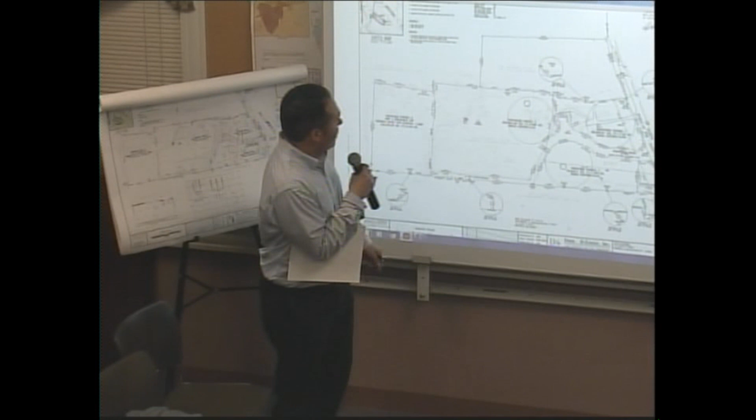If we could go to the next sheet, I think it shows it a lot more clearly what we're proposing. So there's an existing home right here that has access off North Street. There's another existing home to the rear of 113 North Street, which has access through the other driveway of the home that fronts North Street.

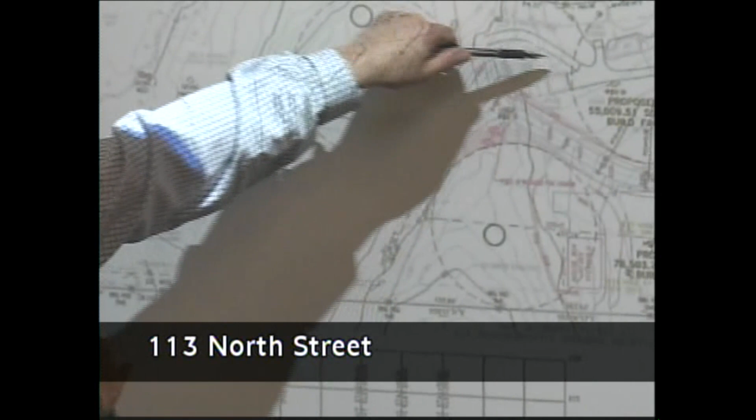The proposed work is to add a roadway, essentially a driveway, that would provide access to this existing home in the back rather than go through the other property. We would also add a new home off this new driveway.

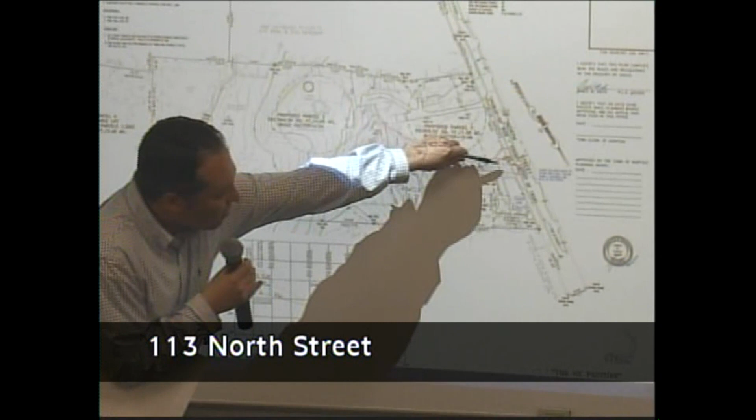We're looking at an 18-foot roadway driveway with a cross slope where we would have a grass swale, country drainage to a low point, and then there'd be a culvert that would bring the stormwater to this natural low point, which is where the entirety of the site drains today. So we establish the same drainage pattern with the proposed versus the existing, take advantage of that low point, and we'd have this country type drainage system, keep things simple.

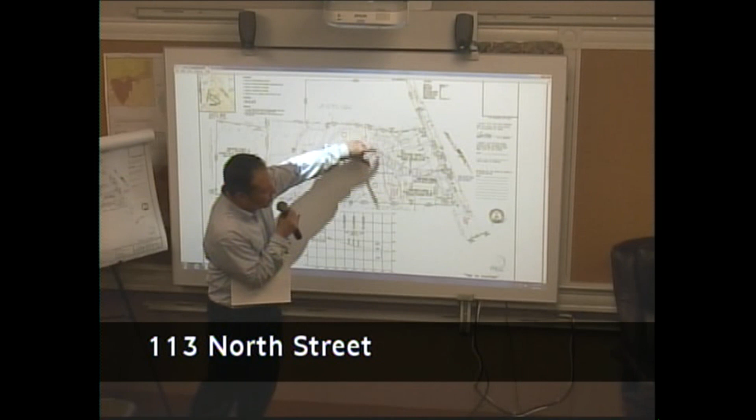The only piping would be a culvert that brings it from one side to the other. The goal is to clear as little as possible, keep this natural, so what we do is only clear enough to get that pipe in the inlet flow. Other than that, we would keep it natural. We've done what we can to keep the grading limited as much as possible. It's entirely within the right-of-way that's shown.

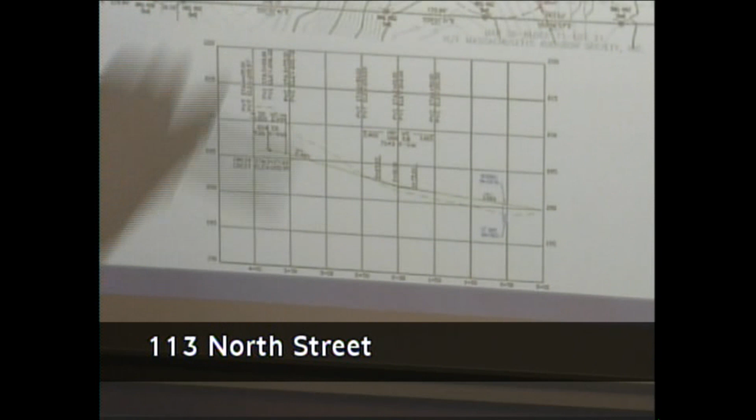We have a basic profile here that shows a grade coming off North Street up at 1%, and then it transitions to 2.4%, so there's a slight vertical curve. This detail here just shows the cross slope. It shows this grass swale that'll be on the south side of the new roadway.

As far as new utilities, again, one drainage pipe crossing. We'll have a new water service for this new house, and we'll have new electric service for this new house. And that's underground? Underground.

That's the basics of the project. We have other sheets with construction details, but this gives you the overview of what we're doing. So again, 2 existing houses, we're adding a third and making it simpler for access to this rear house.

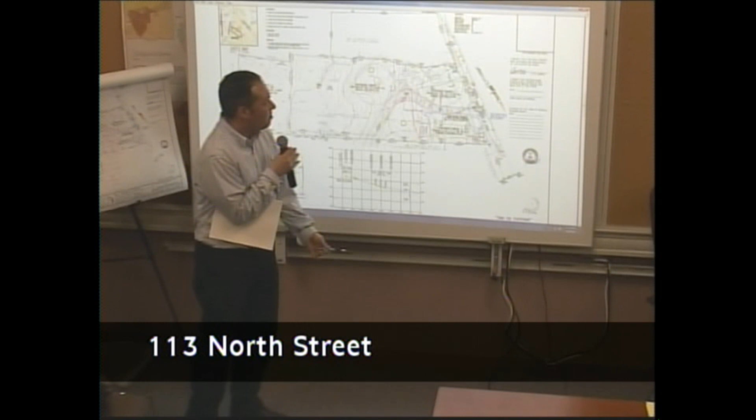There's also, if you look through the peer review, an existing garage over here that has been here a long time. All of the homes here will all be part of the same family. I know there were some comments about the garage possibly being non-conforming in how it was set up, and they understand that. The goal is to keep it as is, because it's been there for so long, and it's part of the same property that the family will continue to use.

A lot of the comments had to do with waivers, whereas we don't have a traditional roadway with curb and lights and so forth, where we have the country drainage approach. It's very similar to just a widened driveway.

So when you say country drainage, you're talking about a low-impact drainage? Exactly. Did you do a drainage report on this? We did. Okay, we submitted a stormwater management report with all the calculations. And that works, the soils work? They do. So up in this area, you have Group A soils, and then it transitions to Group B soils. In this low point, it's Canton, fine sandy loam.

So, good soils. We did test pits over here, where the proposed septic will be for this house. We were consistent with the soils mapping. We went down 11, 12 feet.

How long is the roadway? It's just under 400 feet. It's 395 feet.

18-foot road, did you check with the DPW on that? Because right now, we're widening roads that are 18 feet where two trucks can't pass, or a fire apparatus and a vehicle without stopping. We have one over on Lawrence Street now that we're bringing up to 24 feet that is currently around that.

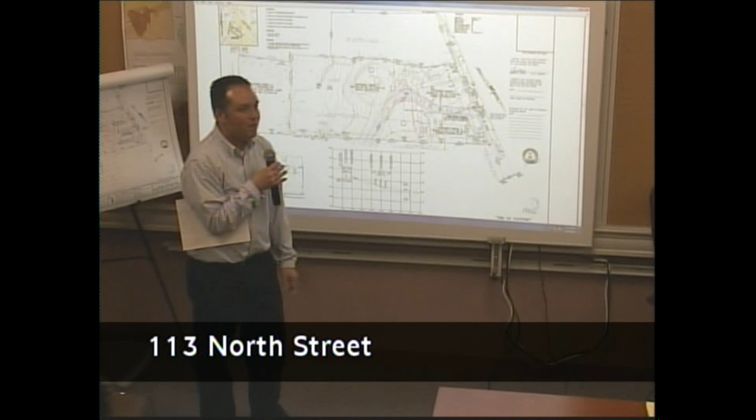We didn't, we filed it, and we'll need to get their review and comments. We have a shoulder on each side of the pavement, so it gives you an extra 3 feet on each side if it's really tight. But I think between the shoulder and the pavement, and the fact that there's one house in the back, and we have plenty of sight distance, I think we can make it work with how we show it, as long as it's acceptable to others that are reviewing it. So are there swales on the side of the street for the runoff?

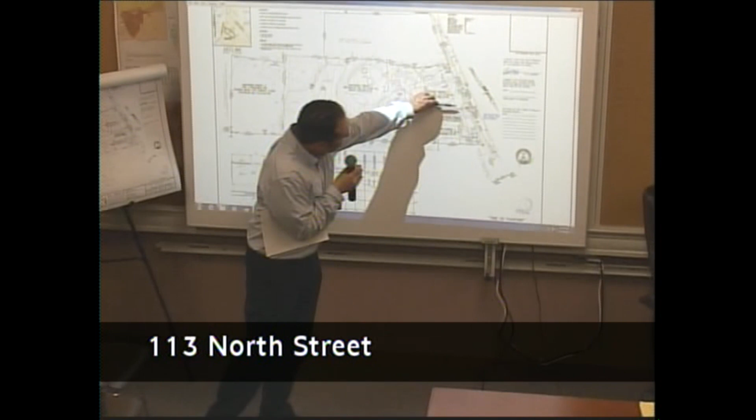There are. So there's a cross slope to the pavement from the north side to the south side, and on the south side we have a swale along the length of the road to a low point at about station 0 plus 50, and then we have a headwall with a 12-inch pipe culvert that brings the water that runs off on the south side of the road, as well as the roadway itself, to this low point where it goes today.

We had the same thing here on a road over by the airport. We have no curbing on the side with the swale. You have the potential of the runoff undermining the asphalt and getting in there.

And is this going to be a town-accepted road? Is that your intention? Oh, it's not. It's going to be a private road? Okay, yeah, okay.

Because over time, with the ice and the snow and the rain, some of the runoff coming down undermines the asphalt, and you get sinkholes where the edges start to break down. In the past, I think we've had something like a foot or so of crushed stone along the pavement area to act as a buffer, so the runoff wouldn't undermine the edge of the roadway, but that becomes less important if it's not going to be a town-owned property.

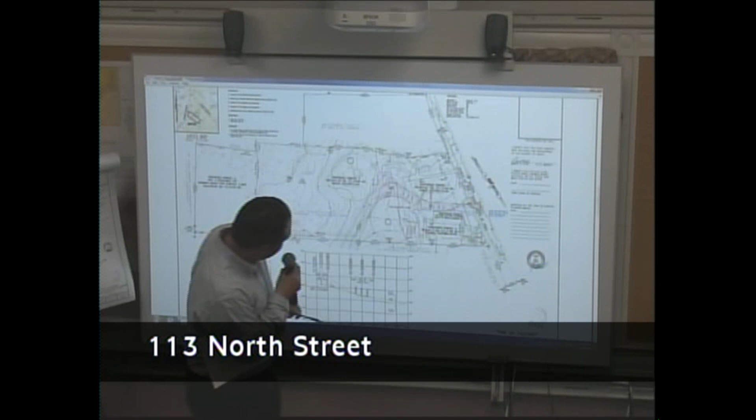What's the earth removal situation here? I have to run the calculations, but it's showing a fill, or slight fill, coming in from North Street until about halfway up the road, and then there's some cuts on the side. I don't know the exact quantity, I need to figure that out.

Is it, do you think it's a balance, or? It's close to a balance. The only cut is the side slope area over here. I believe it's below the threshold for the earthwork permit, but I can confirm that.

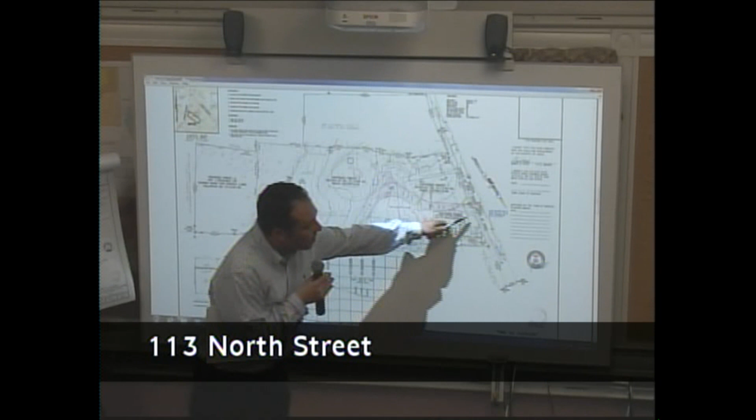Is that area wooded right now where you're putting the roadway in? It is. So you're going to maintain that, as much as you can? Yes, we've been able to get the grading and match it as close as we can so that we don't clear outside of the right-of-way. We can maintain this natural area. And really, you'll just see a driveway opening and some clearing at North Street.

Does the old road, is that just obsolete? You may have mentioned it before and I didn't hear it. So there'll be a section of the old driveway that accesses the back lot, and yeah, this would become obsolete. It would actually go away.

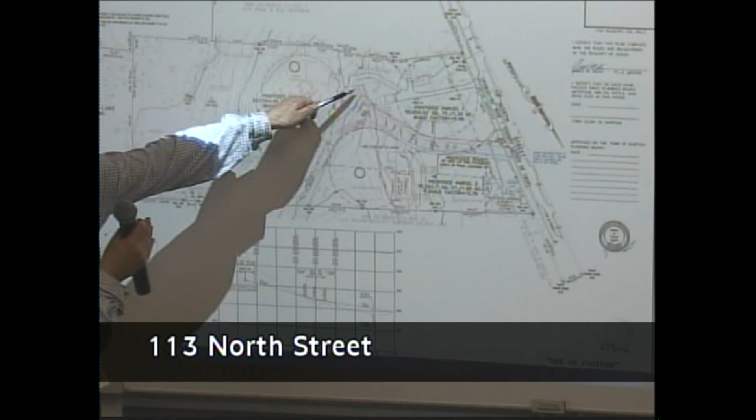One of the review comments was to work out a construction detail where we come off of the new roadway to transition to the house, so we didn't show that level of detail, but we will. Is that why, Rich, the beta isn't here, because you're going to have a meeting beforehand on these issues? Yes. Okay, good.

Okay, any other questions by board members? No, mine. Aaron, you okay? Anyone in the audience care to comment or ask a question? Please use the mic, go ahead.

Donna Jones, North Street, but not an abutter. I also have spoken to Doug Williams, the director of Mass Audubon Stony Brook, who is an abutter on three sides.

Could you go to the other pages, like page 5 and 6? Yeah, sheets. Well, what is that, 6? And on this next page, the pink.

This is a pre-development subcatchment map. The yellow areas are part of the drainage calculations, that's the catchment area that drains. Then the next page, that same area is shown in pink.

The previous drawing was pre-development, that's existing conditions, the watershed that drains to the low point. For post-development it just showed a different color. It's that same catchment area, but we've broken it up into smaller areas to reflect the house lot, the roadway, now that it's changed. So that's how we're able to do our drainage calculations, looking at the pre-development and post-development mapping. The colors don't have a lot of meaning, it's just how we showed it.

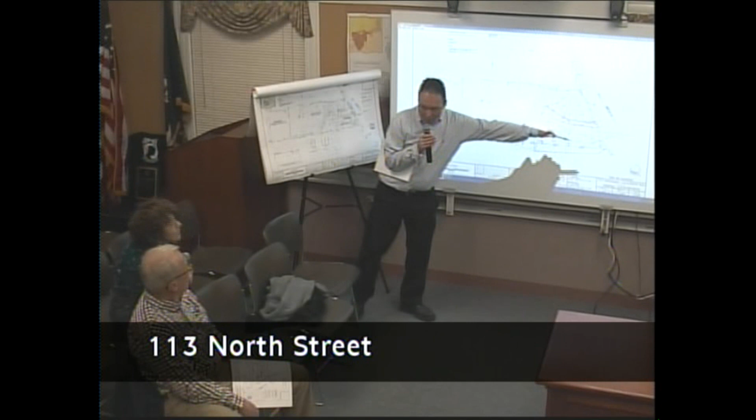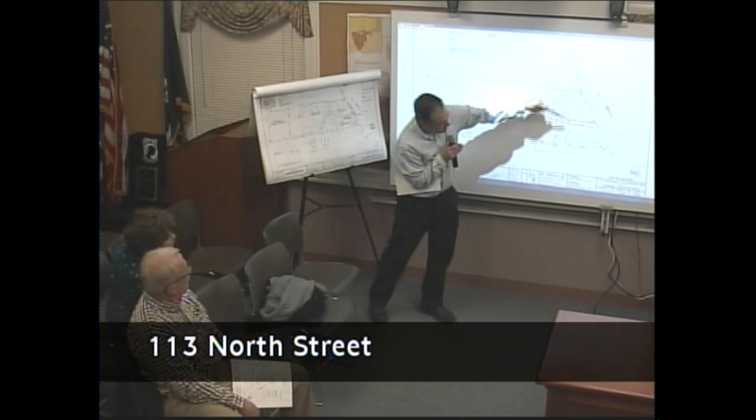And what are the 6-sided figures with numbers inside? These represent each subcatchment, it's just a graphical way of numbering them. It's the area that drains to a particular location. So for example, this outline all drains to this low point, whereas number 3 over here drains to the pavement and the swale. Number 2 drains to the pavement and the swale, and it shows how we built our model of how we direct the stormwater to this point. So if you follow the calculations on the map, it gives you an understanding of what's happening with the calculations.

So this back section, right at your left shoulder, is not to be disturbed? Correct, so everything this side. No, I meant the back, that back will not be touched, and that's wetlands. Correct, wetland resource. Correct, partial. Remains the way it is. Yeah, partial wetlands and...

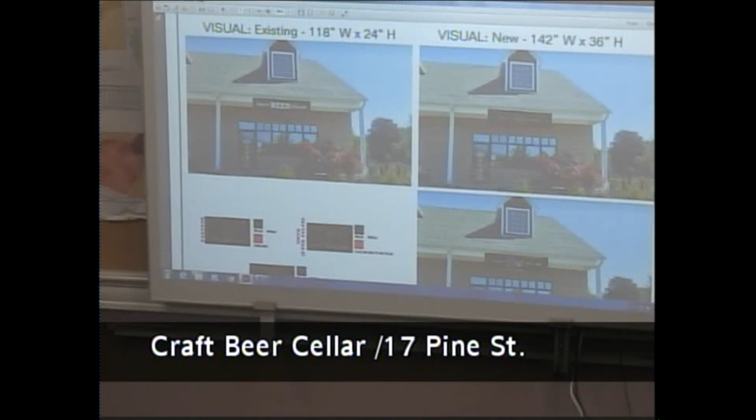So on the left is my current sign in its current size, and just to the right of that is a mock-up of what it would look like with a slightly larger sign. I think that unless you were looking for the differences, you would probably not spot the difference. So I'm pretty sure that would be acceptable to the overall scope of what the rule is about, which is you don't want anything too ostentatious and big. I get that.

But it would allow me to put slightly larger lettering on it, and hopefully be a little bit more visible. It's interesting, just looking at those two pictures, even though the sign on the right is larger, the font chosen on the sign on the left stands out a heck of a lot more.

That's true, and one of the unfortunate realities of my situation is I'm a franchise, and I'm required to use specific fonts and trademarks. That was the one that was approved at the time of my opening, and sadly, a mere 5 months later, the franchise decided that it was going to change their branding.

Can't win, you will lose, and you must play, huh? Yes, sir.

But it's a much thinner looking script. Yeah, I believe we would be using something that's more like the option underneath it on the right, the bottom right one. So that is a little bit more visible. In fact, at least the word beer will be visible. That's one of the reasons I wanted to do this now, is because I'm forced to go with that slimmer looking font, and I want at least a hope that I can be noticed from the road.

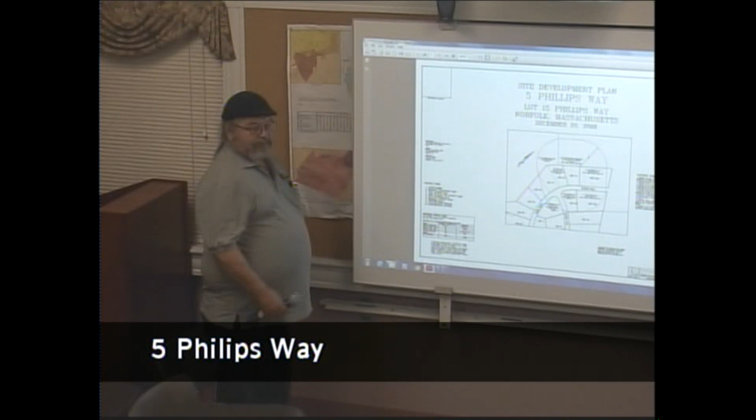So before we get started, just a couple of points from last meeting. I know the question came up about the site plan not being expired yet and whether to relinquish the rights, and so forth. So I did talk to town counsel. In this particular case, it worked out okay because the timing elapsed, so it wasn't an issue. But in the future, it would be good to have the person relinquish the rights to the previous site plan approval.

But it didn't end up being the case here. Although in this case, it would have been even more challenging because they bought the property and it was another property owner. But needless to say, it's not an issue here, going forward. And then there was something else that we talked about. Well, I'll let Jim present it, I remember it. I'll interject. Good evening, Jim Susi with United Consultants.

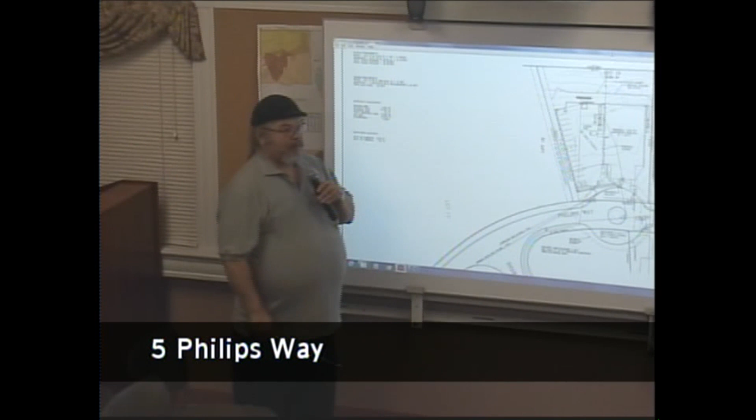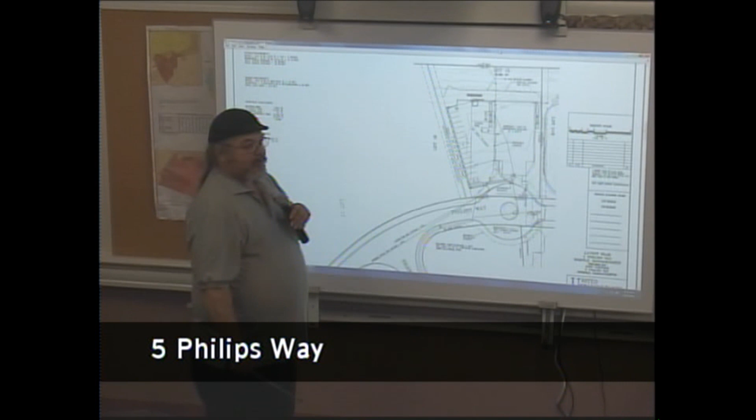We've begun making revisions to the plans based on Beta's comments. I had sent Betsy over this afternoon a somewhat revised plan for the stuff we've had a chance to address. On the basic layout plan, I believe we had 12 parking spaces before Beta determined that we need 18. So we now have one here next to the building, a row down here to get us to 16.

And 2 more in between these 2 overhead doors. We're showing the required 400 square foot loading area. And to make this all kind of fit, the dumpster originally was down in this corner. We've moved the dumpster to here, and this will now become a landscape island, which will help us add a little bit of the interior green to get to that requirement.

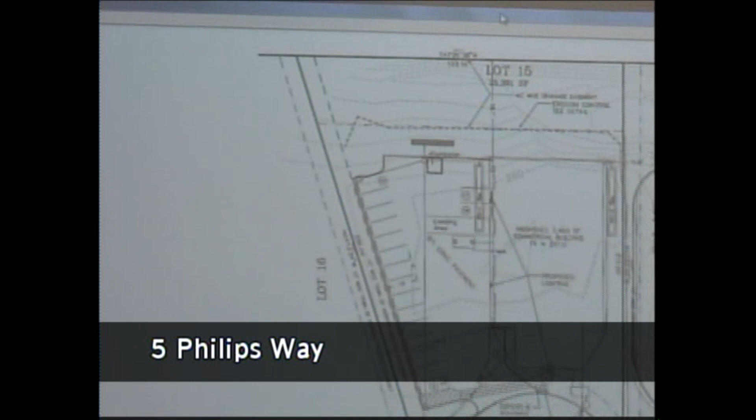Where are you gonna put the snow? I have to take a look at where we had it before. I think we were just putting it on top of the landscape island. Yeah, that's the question. Again, by the zoning regs, it says we need 18 parking spaces.

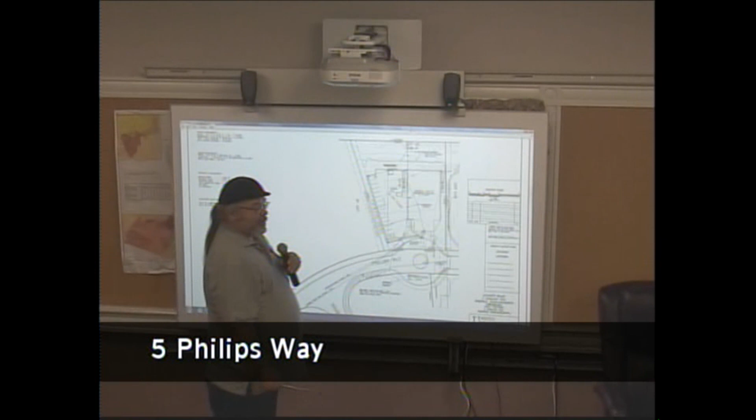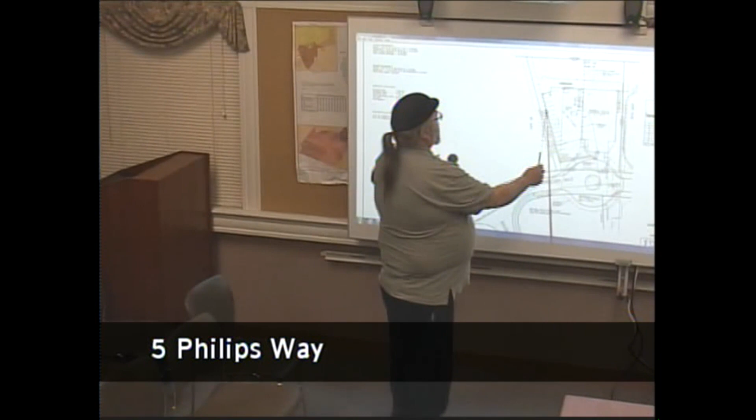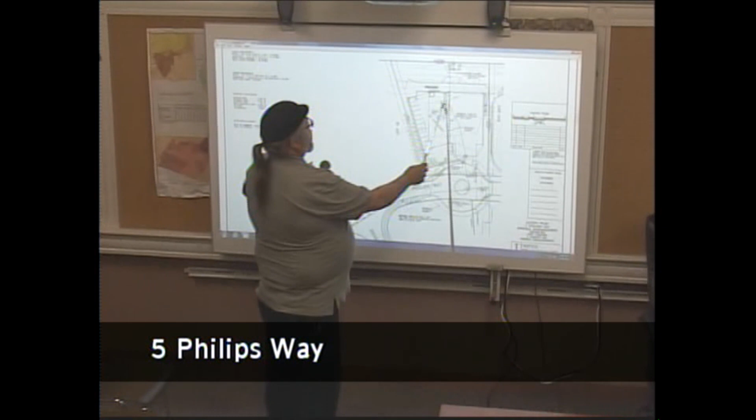In all honesty, John, you need about 8. Okay, so understood, these spaces over here are available and can become the snow storage spaces. Again, we'll probably just use this one here. We've got the one handicap and 3 or 4 here. I doubt we'll ever get to the point where they need the spaces between the doors. I need them down here, so we can tuck the snow there.

There is a helical separated catch basin right there, so as the snow melts it'll go into that, be treated prior to discharge. And again, we moved that over. We moved this catch basin to a location here. We just moved it up from this corner to make it work.

Everything is pitching this way. Even this corner will be coming back here. So we've got the one basin here, the one basin there, to the manhole, to the level spreader. We will probably be requesting a waiver to have the underground recharge for the roof leaders less than 25 feet from the property line and less than 25 feet from a building.

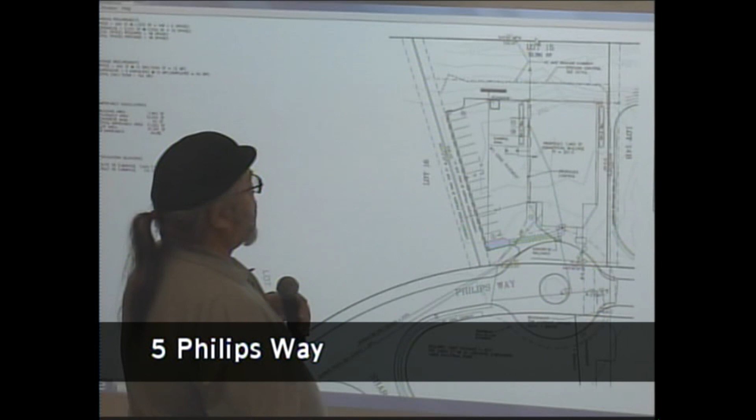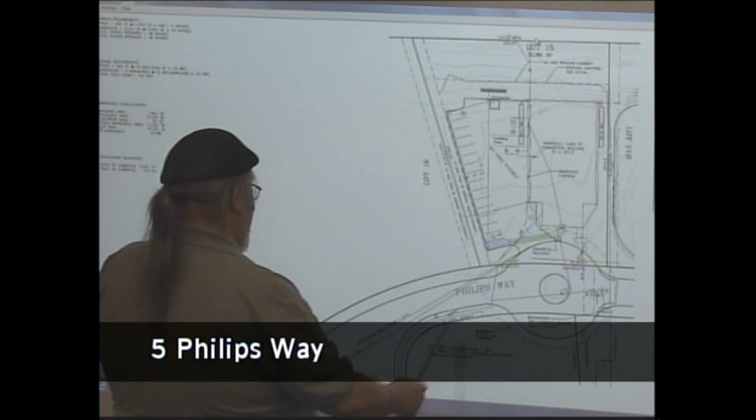Question came up on the sight distance. From the center of the driveway here, we've got about 215 feet to the intersection of Sharon Ave, and about 325 to 350 feet coming down this way. The required sight distance on the original subdivision plan showed 200 feet either way, so both of our sight distances are in excess of what was approved for that industrial park.

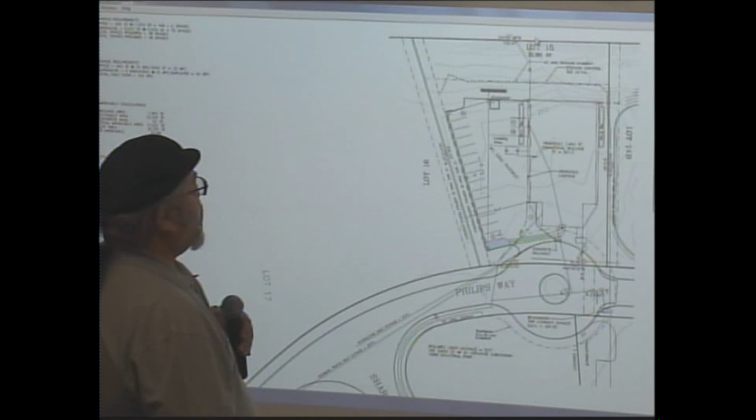Other than that, we really haven't done a whole lot. The other thing that came up was the handicap access. Betsy, can you go to the next sheet, please?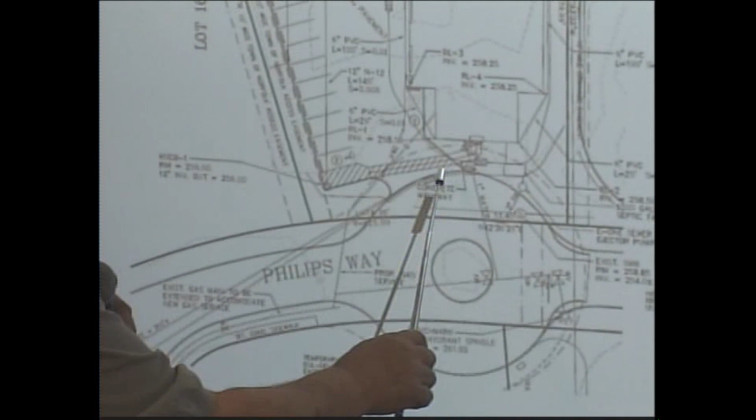Okay, you can't really see it too clearly here. We do have some spot grades at the door, halfway here, and then we hit the 260 here. What I'm proposing is a depressed sidewalk, if you want to call it that. In other words, the edge of the sidewalk will match the edge of the pavement right here, and then we'll just go on about a 5% slope up to the door, which is within the 1 to 12 that's required. And then at the throat, I did do a detail where you'll have a depressed stone across the walkway, and then kick-ups 3 feet long, and then just landscaping to the edge of the 5-foot wide concrete sidewalk.

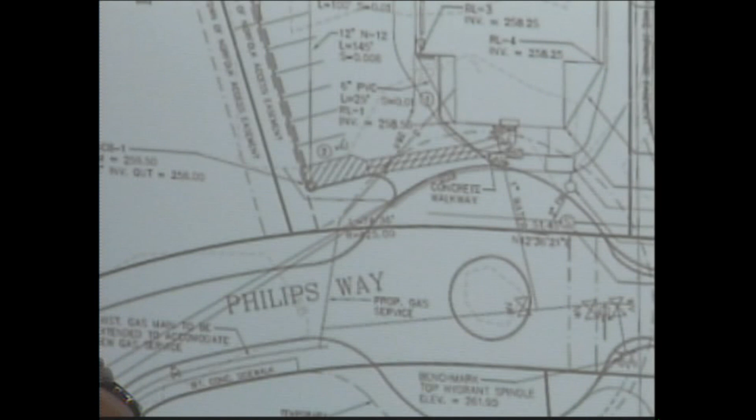Okay, that's about all I've had a chance to go through. I know I have to relook at the drainage.

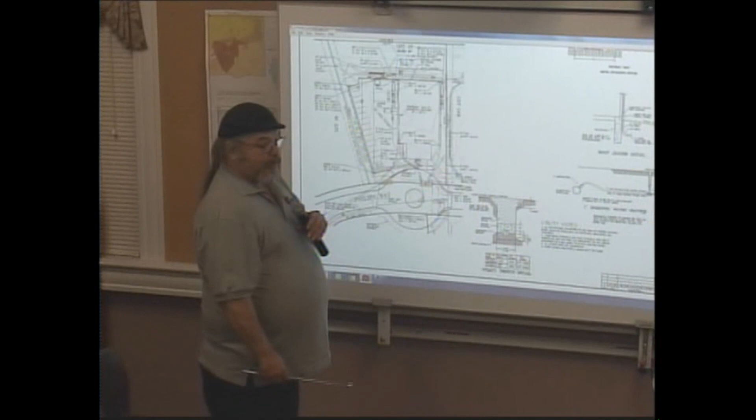Is that walkway ADA compliant? It's 5 feet wide, it'll be flat across, and it's going at about a 5% pitch. And that's acceptable? I believe a 1 to 12. Okay, and the vertical? Yep, up, which is about an 8%. 8%, yeah, so okay, right, yeah, we are below that.

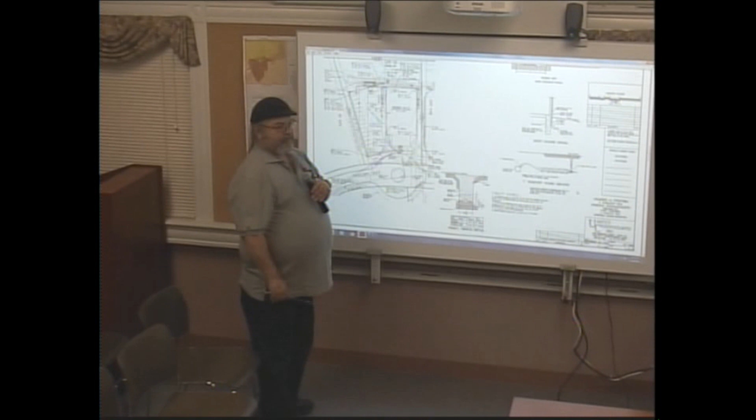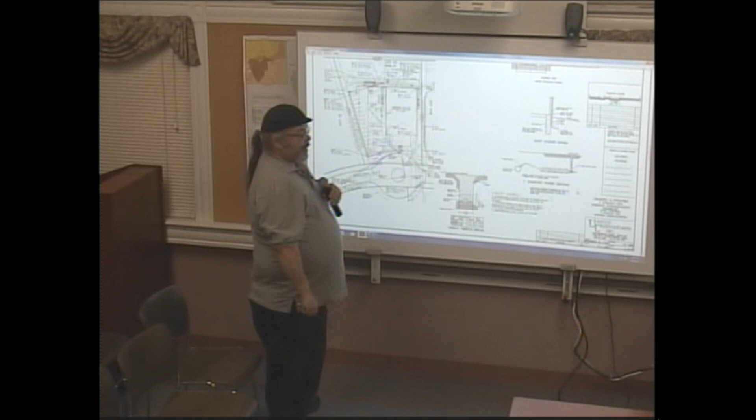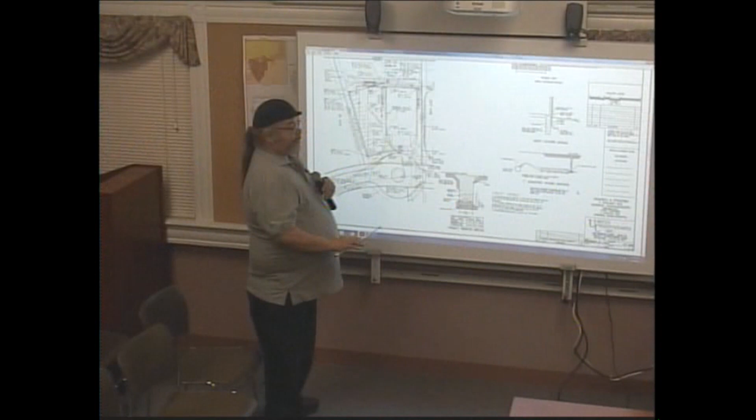But it's not continuous? Does it stop at some point? Are there platforms, or is it not? No, it's continuous from the edge of the pavement here all the way to the front door, and then right into the building. And that length is how much? It was 25 feet, I believe, no, 15 and a half feet from here to there. And ADA doesn't require a flat landing over that distance? Well, no, because we're not that steep and that long. Again, I will take a look at it, but being only 15 feet, I think we would fall under that threshold. I thought that 15 was good. Sure, okay.

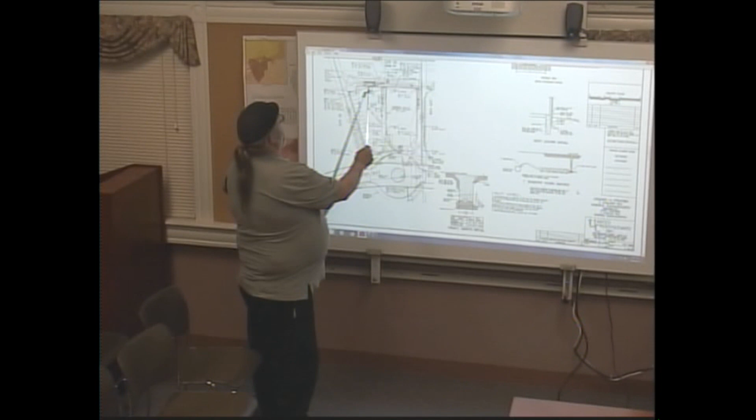And why is the notch on the back of the parking lot over there? I didn't quite notice it. Originally the pavement was squared off out here, and the dumpster was in that corner, but we had like 6 more parking spaces here. So with the parking coming down, there wouldn't be a way for the truck to get in to service the dumpster. So we moved it over there because of the increase in parking, and that corner just became no need to pave it. Wasted asphalt, sure. But couldn't snow end up going back there?

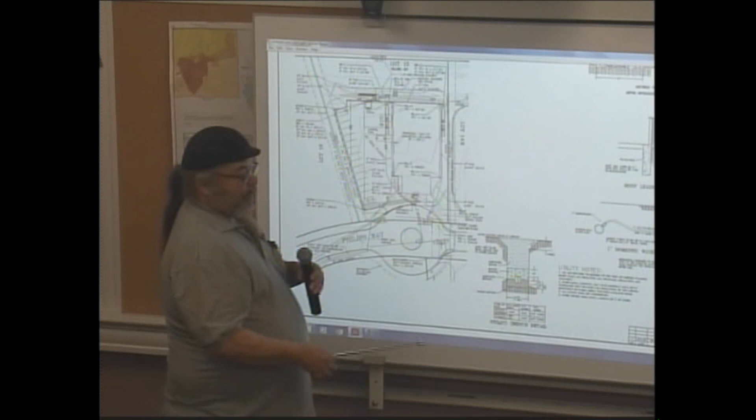No, the only thing - if we go to the landscape plan, I've got a tree and some shrubs in this corner. But again, like we said, we only need probably this many spaces. I don't think there's a problem having the snow down in this corner, and again, with the basin in the corner, as it melts, it'll go right and get treated and then discharged.

Other than that, it's pretty much the same site as before. Okay, thanks, gentlemen, any questions?

Maren, you okay? All set, unless you want me to comment on the design review board's comments. Sure, why not? I'm just going to read from Bob's notes, so I don't have to interpret.

DRB received a presentation of the 5 Philips Way project, noted it was the same as previously submitted, but needed lights and building colors noted on the elevations. It was a new site layout, however, with the entry off Philips Way. So I remember the conversation being pretty quick. I think it was more a formality of getting the materials noted.

In terms of lighting, is there a lighting plan in the sheets? There is a lighting plan. Well, Betsy has disappeared, so.

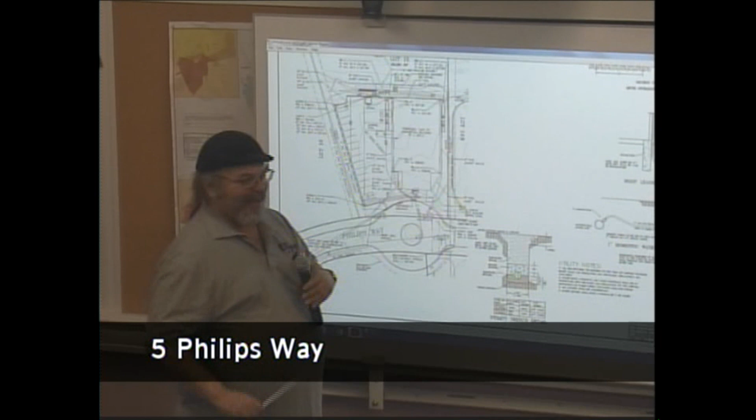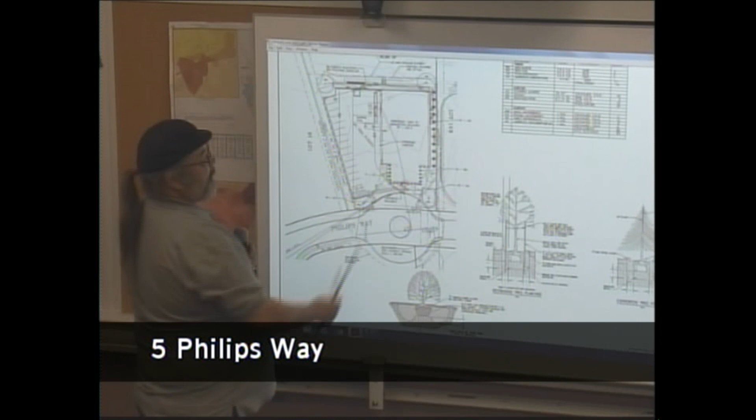I think the comments on the species were acceptable too. And the lights, we're looking for the lights, right, Rich? Just getting there.

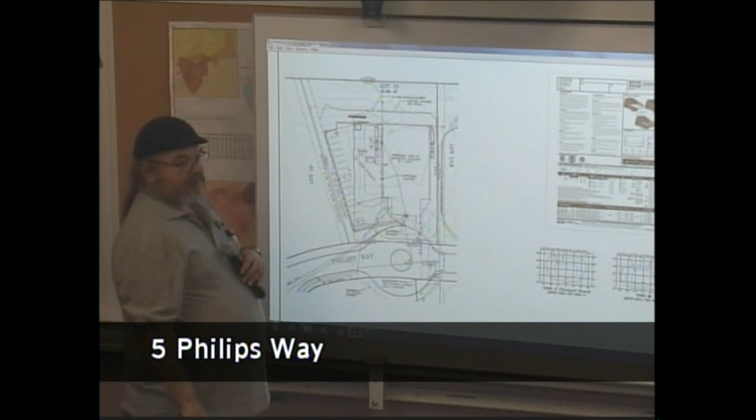Any comments from the public? All right, so what's the next move, sir?

They might not have heard, but the next meeting will be May 1st. What I want to do is gather with you and Phil and go through all these comments, so we can put this in position for approval on May 1st.

All right, and we'll have a draft decision prepared between now and then. Yeah, I'll have to have it ready to go.

So you're going to look at the elevations and make sure all the materials and colors are noted? He doesn't have to come back to the DRB, does he? No.

Can you email the files so we can look at them? If you can send those to me with the colors and the elevations. John has the people doing the building working on that. Okay, and then we'll get it to DRB.

So we need a motion now to continue the hearing until next meeting, correct? Yes. Motion to continue until May 1st, at 7:20 PM. Do I have a second? Second. All in favor, say aye. Aye. See you next month. Thank you.

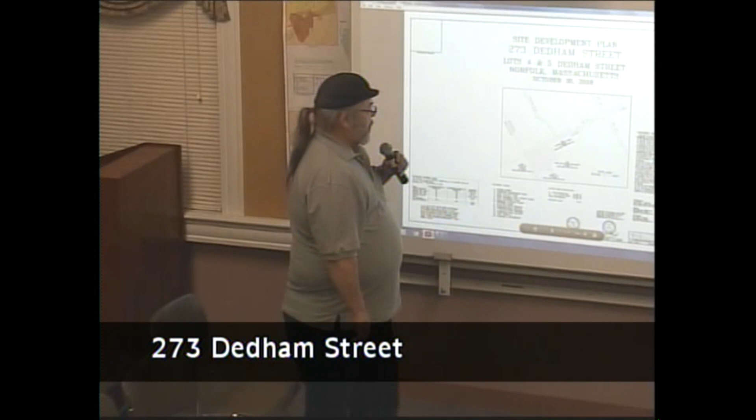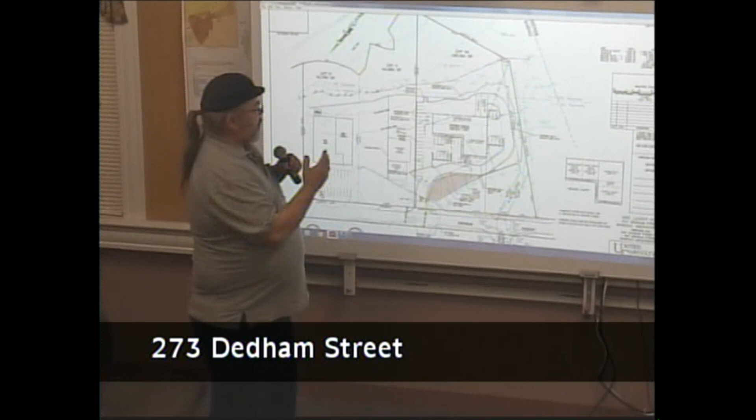As Rich says, we have completed all of the revisions per Beta's review letter. We resubmitted the new plan set, the drainage report, a letter addressing all of Beta's comments, the O&M manual, all the stuff Phil had asked for. From the last time, we had shifted the building forward a little bit, staying outside of the 50-foot buffer zone. We amended the parking to be along here. We've only got 2 spaces here, and we need the handicap space for the door in this location.

We've got some spaces here, handicap for that door, and an island with some spaces there. We've got some spaces out here in the back. I think there's 6 spaces for the vehicles that will be worked on inside the building. So we've done away with the parking in front of the building as much as we could.

I believe we have a request into the zoning board for a special permit. Yes, we have a special permit.

Good evening, Lisa Whale, attorney for the applicants. We submitted a special permit application with the zoning board to allow the parking in the front of the building. And I believe we're on May 1st. May 1st is what I was told. Same night as us, yeah.

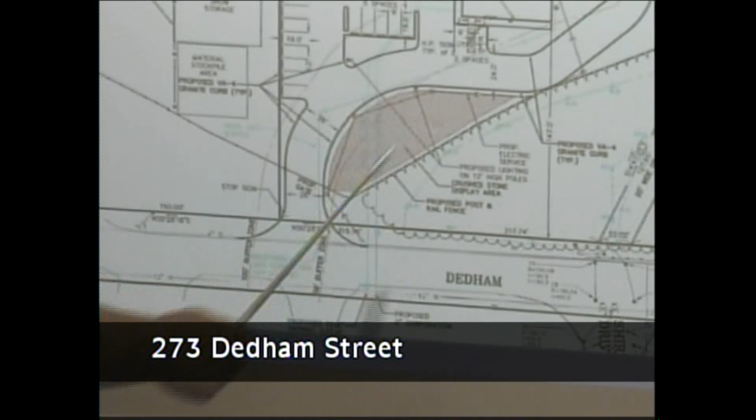One of the issues prior was the display area was right down here, almost to the property line. The regs require it to be 20 feet back from the right-of-way line. It'll be a crushed stone permeable surface. Can we go to the next sheet, the drainage plan, please?

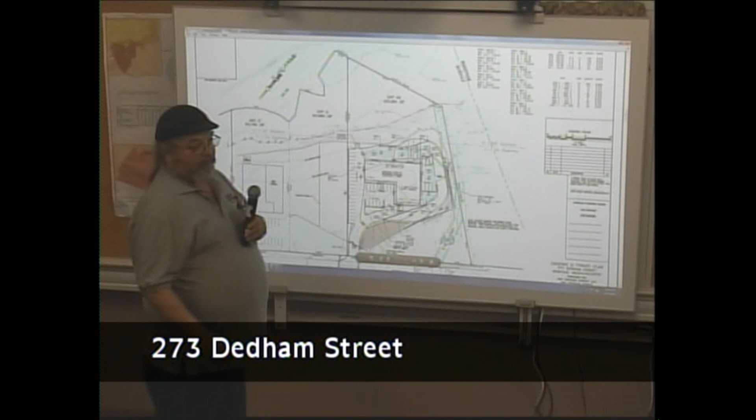All of the catch basins are helical separated catch basins, so all of them provide 80% TSS removal and oil separation so that we don't have issues with anything. And they're all, outlet manholes are all tied together, and that will go over to a level spreader in this area here, which will dissipate the water over 75 feet of width.

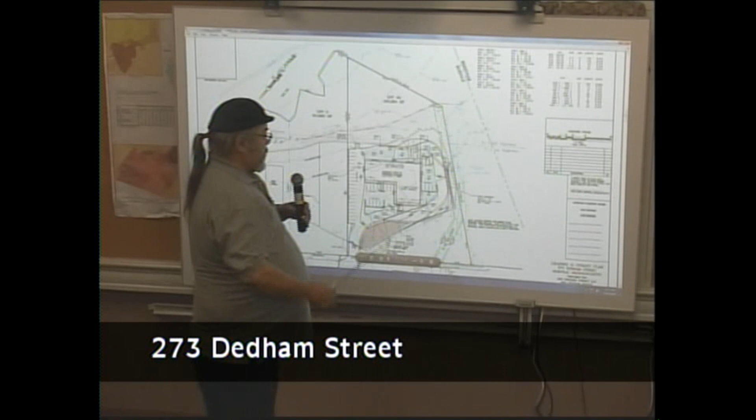One of the things that Beta did ask, when we get further into the detailed pages, is that the outlet on the level spreader have a curbstone lip to it so that it would remain flat. So when we get into the details, we have a 9 or 10 inch wide granite stone laid on its side with riprap on the downside so that we don't have erosion from it.

During the 100-year storm, the water coming over that will only be about this high, so it really shouldn't erode anything out to the wetlands. With the infiltration that we have, we've greatly reduced the runoff, both rate and volume, coming off to that area.

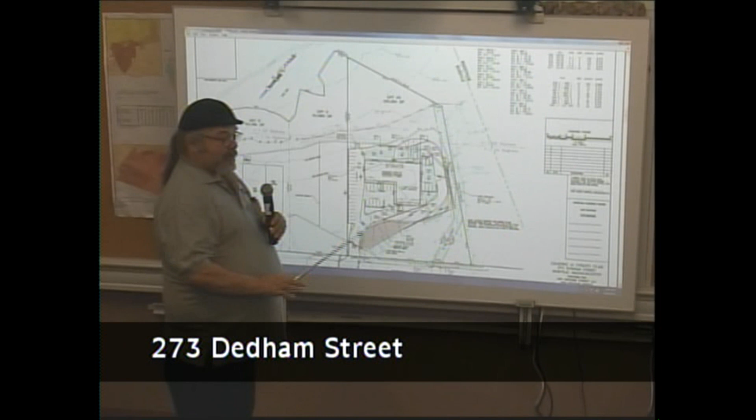We've shown the water services coming in here. We've got a 2-inch domestic service, 6-inch for fire. Whoever's going to design the fire suppression system may change the size of that, but right now I've got it in as a 6.

Gas will come up and go to this corner of the building over here, and the electric will also come up over here. We've got that rather large landscape island over there now, so these really shouldn't be visible in that area.

Again, septic system is still in this location. That's where we had done the original soil testing on it. So we've added some interior green to it. I think we're up to around 8 or 9% with this island, this large island, and the island over here in the back. So I think we're over the 5% required for the green space.

You want to go to the next one, Bets?

Okay, here is the landscaping plan. One of the comments from Beta was they wanted the shade trees spaced out a little bit more. I believe we were somewhere around 20 or 25 feet on center. We've moved them to 30 feet as they had requested.

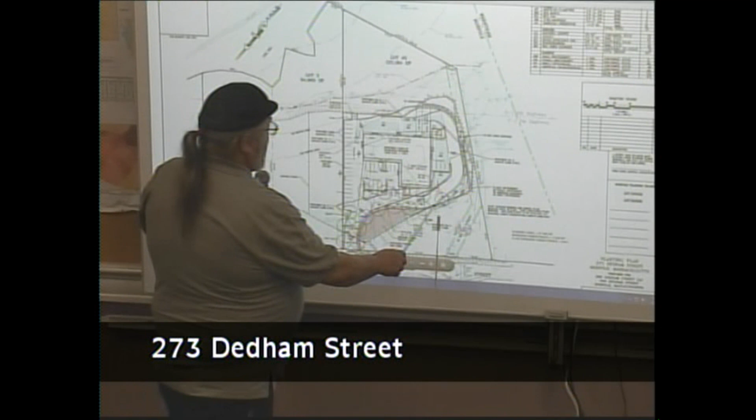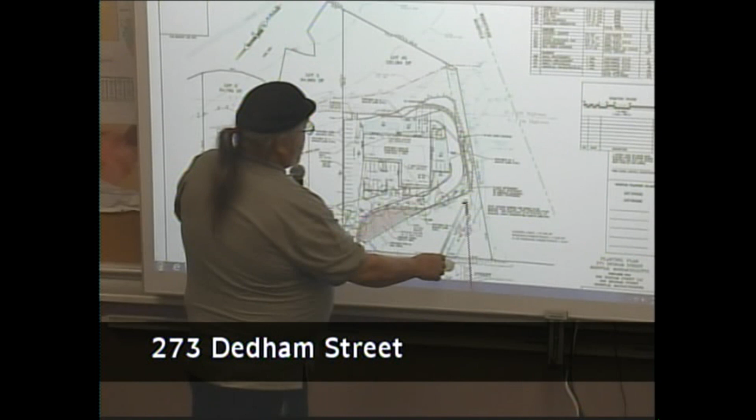We have a bunch of fir trees in this area to dress up the front of the building. Shrub bed coming up the side, shrub bed coming along here, shrubs on either side of the dumpster. We have some arborvitaes for screening in that back corner. We've got some dogwoods along this area set in a zigzag pattern. And then we've got a large habitat enhancement planting area to take care of whoever may be living in the wetland area.

What species are those trees out front? We've got American plane tree, red maple, red oak, and star magnolias.

They're close together, too close to the street trees. So we spaced them out even more. What do you think? Cut them down. He's talking about making the trees spaced out farther.

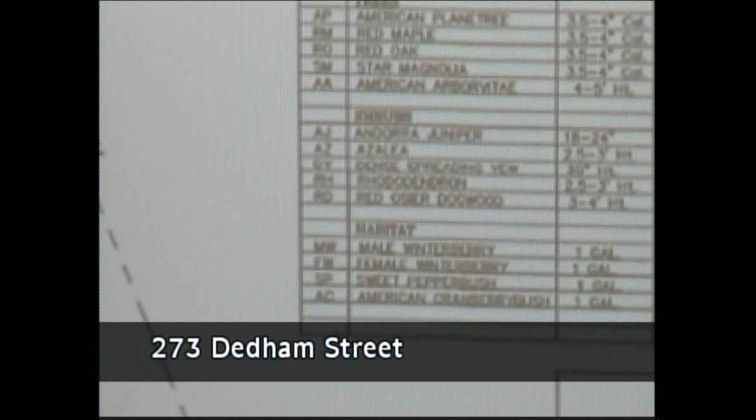Beta had suggested the 30 feet spacing, so that's what we went to. Their business is landscape equipment and whatnot, so we're really trying to make the building look appealing to the customers that will be coming in. I think it's fine. Okay, I'm happy.

One thing that did come up is the requirements say that we need to put a pedestrian walkway along the frontage of the building. In this instance it isn't really feasible because you've got the wetland pretty much right there and it's a steep slope coming from 1A down into the wetland. So it really isn't practical, and again, there are no schools, churches, or playgrounds in the vicinity that would necessitate having the sidewalk there. So we have requested that waiver.

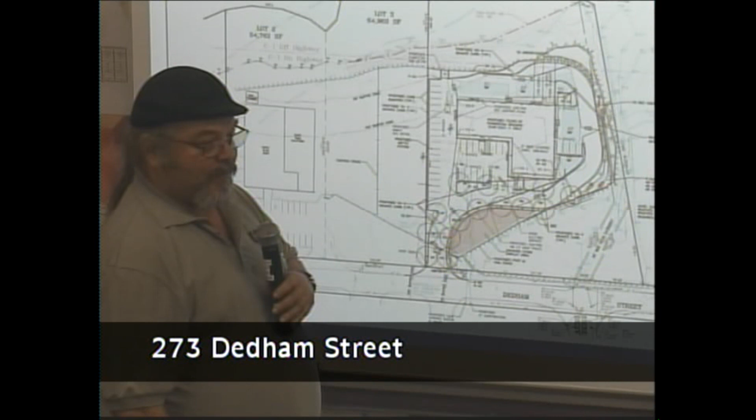Is there a sidewalk on either side of the property? I believe there's a sidewalk on the other side of 1A, but nothing on our side. So even if we were to do it, it'd be the sidewalk to nowhere. But I think Concom would seriously push against having us build a sidewalk in that area.

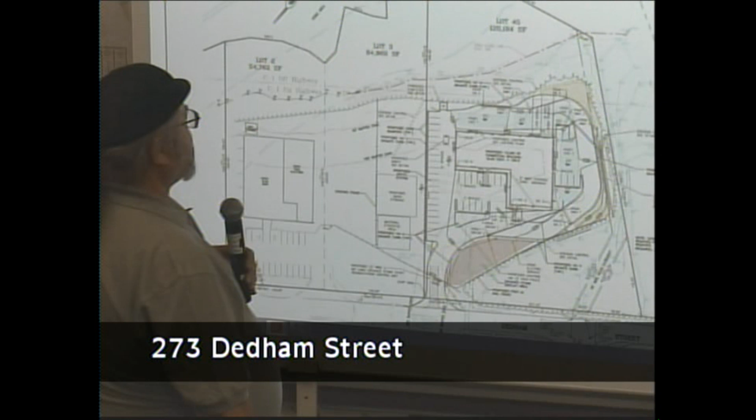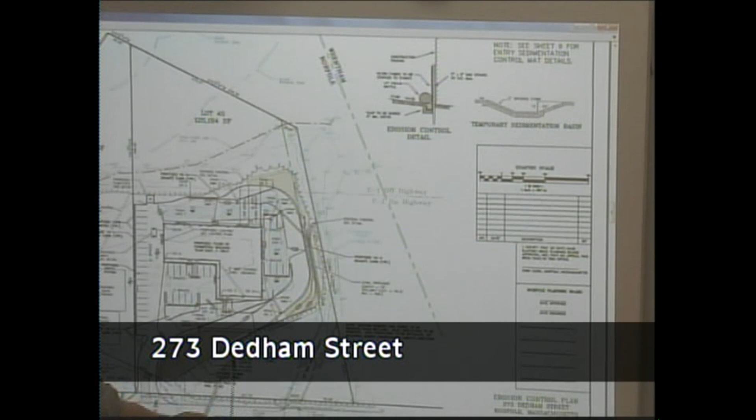Okay, this is the erosion control plan. We've got erosion control with 12-inch wattle, backed up by silt fence, backed up by a construction fence. That will start in this area and pretty much wrap the entire site down to here so that any activity happening on the site will not end up in the wetlands.

We do have a rather large temporary sedimentation pond for during construction. It's just outside of the driveway and paved area, so we should be able to build the entire site and get the binder course down, and then take care of removing that. It's not like we got to move it to finish off the project. We can get everything done with that in place, and then do the grading that's required on the back and install the level spreader.

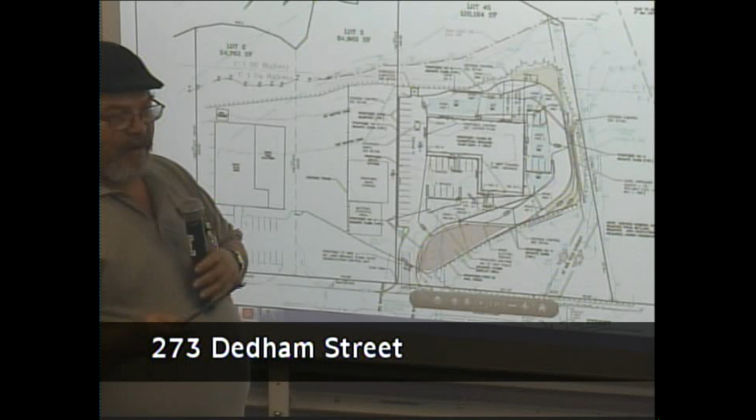Do you guys have a front elevation? You don't have them with you tonight, do you? No, we do. Oh, you have them? Okay. Yeah, we had met with design review on this project also.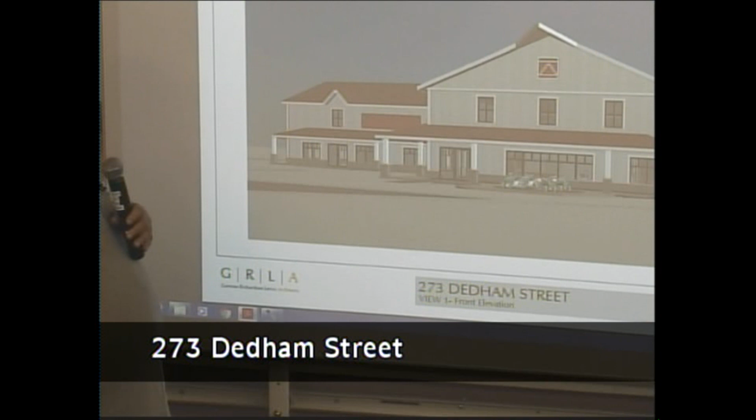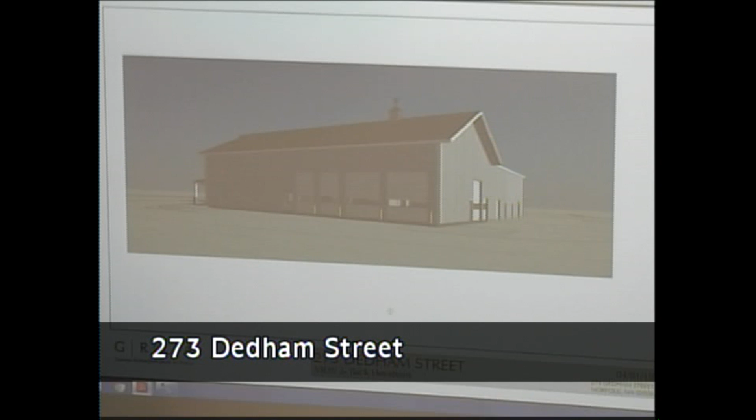I think you guys did a really good job with the modifications you made to the plan. Thank you, a tough lot to work on, but it will really enhance that whole area. The easy ones were built in the 70s, John. Okay.

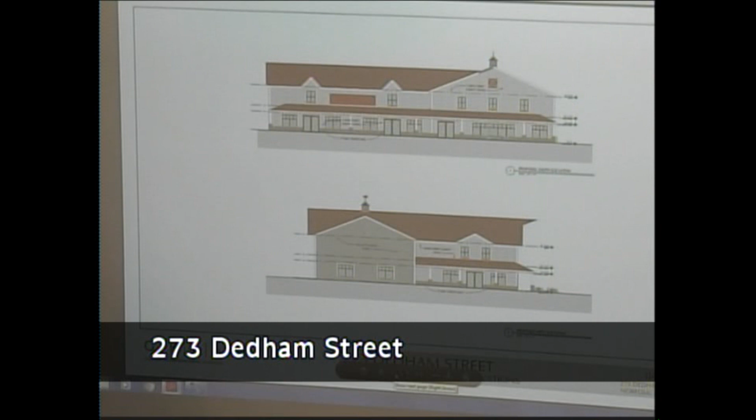Questions from board members? Well, let me start with comments from the DRB. Yep, again, I'll read Bob's notes.

Introduction to the site: the two-story component would accommodate 4 tenants. The front element was proposed to be a 2-story element of gray Hardie panel siding with a burgundy roof. The side and rear portion of the building would be clad in gray insulated metal siding. It was noted that all materials and colors need to be noted on the elevations.

Parking was noted as located on the side of the property along the property line with a post and rail fence and a sliding gate fence in the front of the property line. So again, it's just to make sure all of the materials are noted on the drawing so that we can hold you to account when it gets built.

And that should be okay because there was a member of the architect there at the meeting. I think it was generally, you know, a great project.

Anyone in the audience care to comment or ask a question? No? All right, well, thank you.

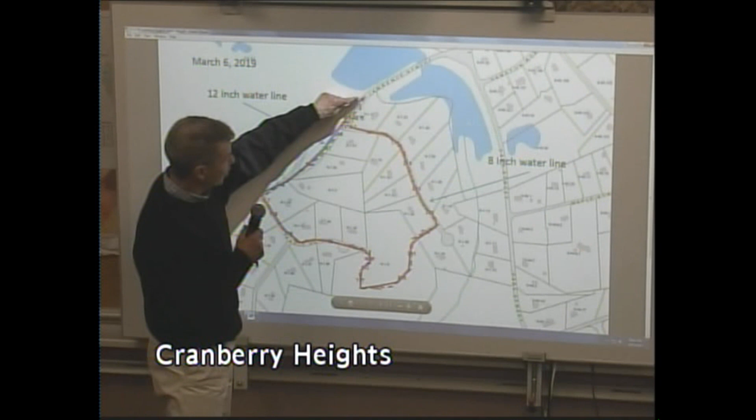What size though? This would be 8-inch. Yeah, right, I thought you said 12. I might have, but that's 8-inch. And when we get to the corner of Eagle, we'd bring the 12-inch back to connect up to Cranberry. We agreed to reclaim this portion of Lawrence up to Cranberry and base coat it with a monolithic berm, and do the same thing to both Eagle and Cranberry, so they'd all be finished with a binder coat on them when we're done.

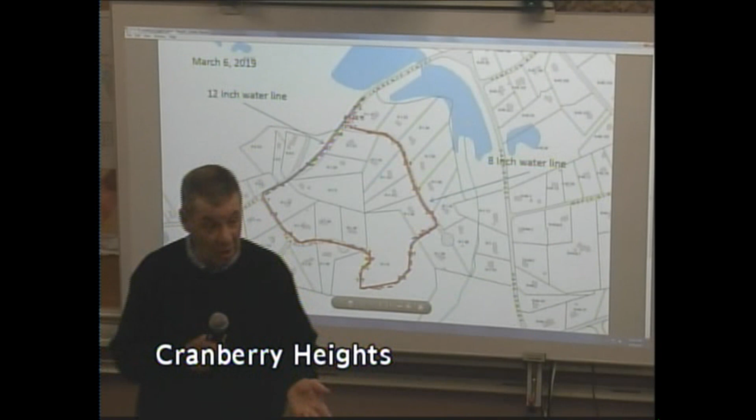So that was the main part. There were some other concessions the town gave, we thought, one of them being to reduce the amount we had to put into the open space fund from $2,000 per lot to $10,000, and then we would have an HOA which would contribute annually for maintenance of the open space. The open space is 16.8 acres with several trails through it, so we thought the 10 grand plus the 21 houses paying an annual fee would be adequate to maintain that open space. Who was that agreement with? Yeah, where did that come from?

That came from the workshop meeting that we had. They don't have any jurisdiction. No, I understand, John, but this is where we worked out what we'd do. I'm not saying it's an agreement for the board, okay, I'm just saying, good.

Just put it on the table, right, when they were asking for more pavement, we put that out there. We had sent it to Rich, I think, the week before. He had asked for a series of things we needed in order to do the looping. We actually had done this setup, I don't know the exact numbers, with the young man behind you on his subdivision, Norway Farms.

Using the open space monies to maintain the open space trails, et cetera, was a great idea, and we know it's done, but the same amount of funding goes in. I forget what you did, we had some type of cross-checks on payments and funding going in to make sure the amount goes into that fund. Yeah, his is Norway Farms, which is tied to lot releases, 2,000 per lot.

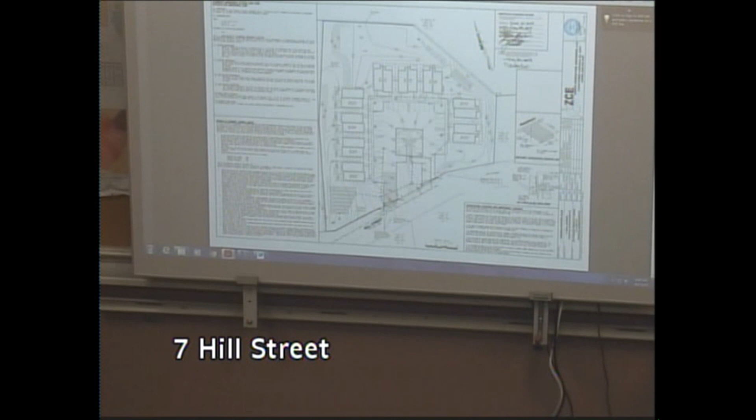Well, the drawing that you have up there is what he's just resubmitted. And the original one, I have a paper copy here, but you must have it as well. Looks similar, but is different enough, in my judgment, to say maybe that's going to affect the piping for the septic system and the drainage, and I want to see what they propose to do to make sure everything works underground. So what he has done is he originally had 18 units, he's scaled it down to 16 units. What he's also done is he's added a 1-car garage to the units. They didn't have that previously, it was just pavement parking.

And then the corresponding infrastructure was downsized accordingly to what was there. I believe that was the approval he has from the Board of Health, but I'm not for sure. I have to check, we didn't actually discuss that, but the Board of Health, I think it was for 16.

So the plan set that he sent us included the septic and drainage? Well, it includes the drainage. I think the septic was on there as well. I think it's a complete plan set, and it's different than the previous submission. It's really hard to go over it without the engineer here to explain it to us. Yeah, it is.

So the detail of it, obviously, since we didn't correspond, he didn't want to come tonight with his engineer. But the larger issue, the fundamental starting point with this is, does all those changes warrant a public hearing to modify this approval, or can it be done with a modification through the planning board, a minor non-hearing modification, if you will.

That's really the question. My instinct is that it ought to have a public hearing, but I don't know what the other members of the board think.

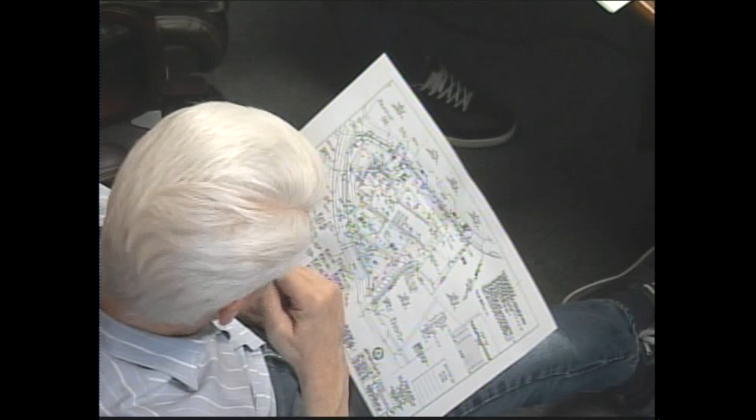Majority of the work has been completed. We were in here about a year and a half ago, and at that time we had filed an interim as-built plan, met with the board, and they had allowed the owners to move into the building.

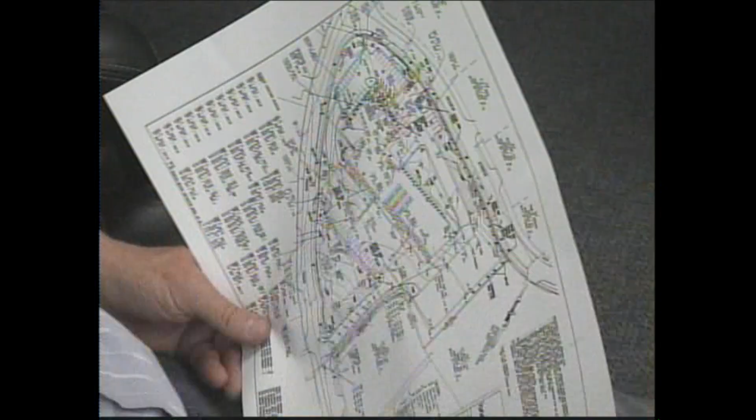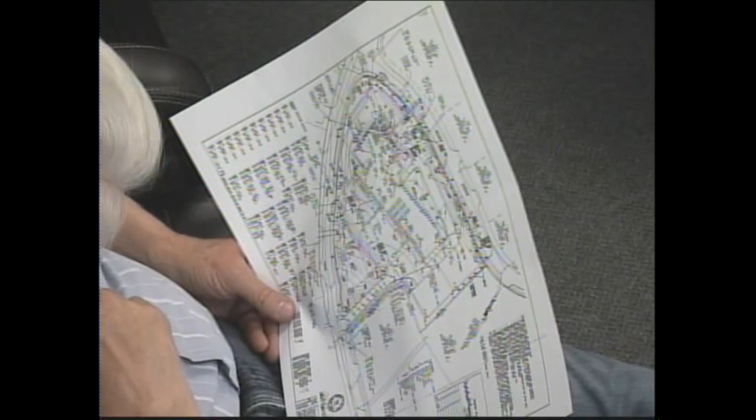Some work hadn't been done, which has now been completed. We've itemized that in our list. That included the installation of the sloped granite curbing, the top course of the asphalt paving, the parking striping was completed, fencing was installed, loaming, seeding, mulch, and ground cover was installed.

Site plantings were placed. A guardrail was installed at the retaining wall, and the frames, covers, and grates of the utility structures were set at finished grade, and that was done prior to the paving being completed.

We had noticed and gone over with the board previously some additional items that were departures from the approved plan, and they were the 5 parking spaces located on Sharon Ave to the east of the entranceway, which were located approximately 3 to 5 feet from the original location. That was due to some site conditions, ledge, site grading, that were just relocated. But the number of spaces proposed were in fact installed, 5 spaces.

Original proposal included some parking lot gates that would be placed in and around that area where those 5 parking spaces were. The entrance road coming in to the south and heading north from Shire Drive, as well as in the area of the entrance to the west, southwest of the building. Those gates were not installed.

Portions of the fence were slightly relocated, but in general it encapsulates the area to the south and east and north of the site, running along Sharon Ave, then along the abutting properties, and then again running along the parking lot on the Shire Drive side, just for a point of reference.

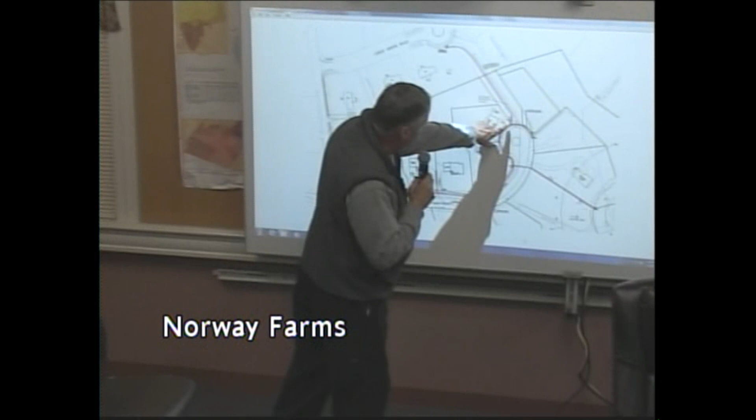So this is a detailed plan of what Eversource had requested, in keeping with their diagram that they sent out, which is very basic. So what we have is one transformer here, a third one here on the street, and then there'll be an additional one down between the two existing buildings.

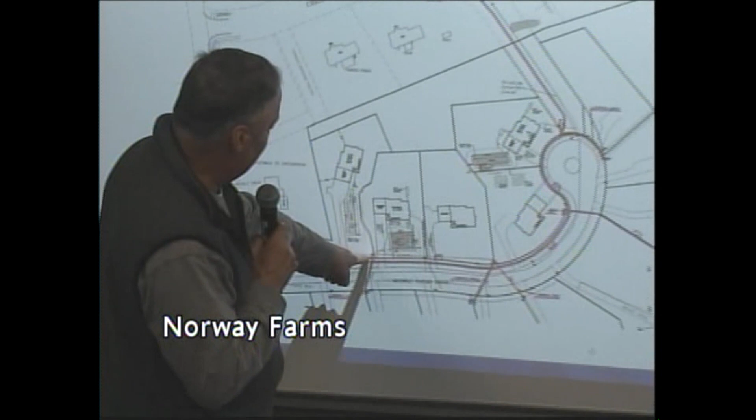As I was saying, the hatch of the transformer faces the public way, so we would be planting the three remaining sides with some taller grasses and some shorter grasses in front, just to take the edge off of them. And they're tying into power up on Crestbrook as well? Yes, there's another transformer up there that already has some planting on it. That was approved at the selectmen's meeting a couple weeks ago, and the easements were finally drawn up.

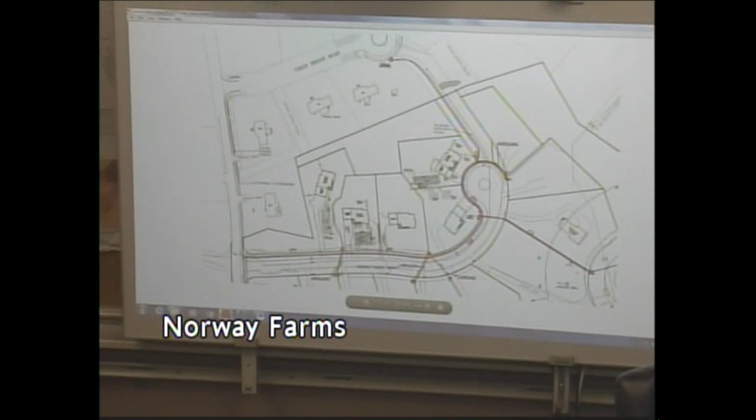That's pretty much it, I have a couple pictures of the grasses and the transformer. Do we have to approve it, per se? No, you're just reviewing it for information, essentially accept it unless something jumped out. I got a picture of that.

That's a picture, that's my existing transformer. My last meeting with Eversource said the new ones will be about the same size, a 3-foot cube. There's the shorter grass, that's a variegated grass, non-invasive. And that's some of the larger grass that would have the flowers on them for the winter.

Good with me. Okay, all good. All good? All good. We understand it, thank you. I don't think we need to approve anything, just— okay, thank you for the, so we're good to go. Good to go, yeah, okay, plug it in.

Rob, it's like you're waiting for a rebuttal line. Thank you. 3 David Road site, yeah it's next. Okay, thank you very much.

Okay, next item is, Rich, 3 David Road site plan. Which, you want to jump to 5 Shire, because Charlie's here. Is there a client, did he come or no? No? All right, I'm sorry, what do you want me to do? Jump ahead? Just go to 5 Shire since sounds like a deal. Charlie came here for something.